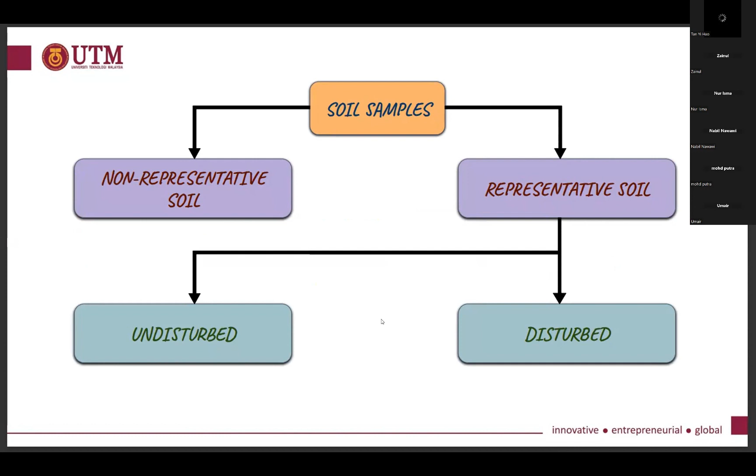Okay, first, a disturbed soil sample is soil that has been changed from its natural condition by excavation or other means, in which care is taken to ensure that at least the composition of the soil remains unaltered. Obtained by more rugged but relatively crude methods, and can be used to determine mineralogy, particle size distribution, liquid limit, and plastic limit. Factors that affect sample disturbance: first is area ratio, second is clearance, and last is cutting edge taper angle.

And an undisturbed soil sample is soil at any depth that has not been excavated or disturbed by excavation or construction, in which care is taken to cause minimal disturbance to the density, structure, and water content of the soil. Obtained by carefully designed samplers, it can be tested in the lab to determine both the physical and engineering properties. The factors that influence the quality of an undisturbed soil sample: volume displacement, side friction, lateral expansion, variation in water content, hydrostatic pressure, environmental condition, and the last is handling and transportation.

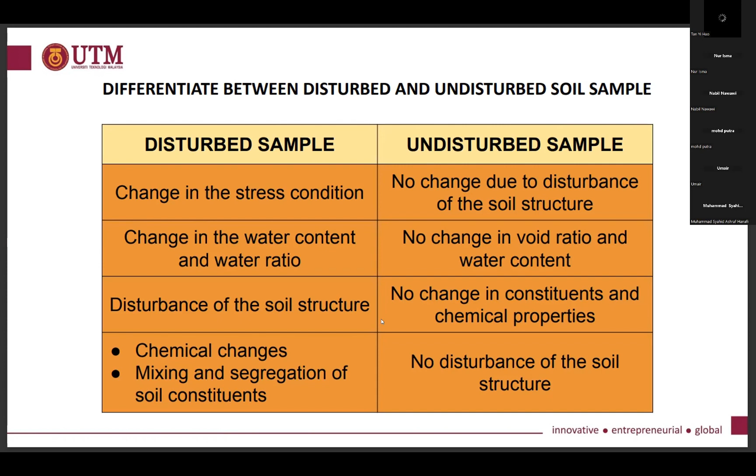Okay. Lepas tu type of sample ni adalah cara untuk kita dapatkan. For disturbed sample dia ada tiga. First is split barrel sampler, second is continuous auger, and last is bulk sample. For undisturbed sample is thin wall Shelby sampler, piston sampler, and block sampler.

Okay, first, the split barrel sampler is used to obtain disturbed samples in all types of soil. Typically used in conjunction with the standard penetration test. The test provides an indication of the relative density of the granular deposit and its approximate shear strength. Used for cohesive soil to determine its unconfined compressive strength. Available in standard lengths of 457 mm and 610 mm.

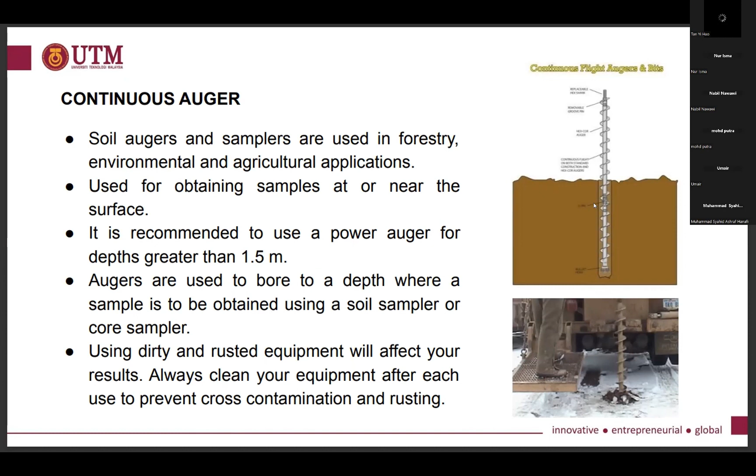And the last, bulk sample. These are disturbed samples obtained from auger cuttings or test pits. The quantity of the sample depends on the type of testing to be performed, but can reach up to 25 kg or more. Testing performed on the sample includes classification, moisture density, limerock bearing ratio, and porosity tests. A portion of each sample should be placed in a sealed container for moisture content determination.

And for undisturbed sample, first is thin wall Shelby sampler. A Shelby tube is a thin walled tube with one end that has a cutting edge and another that has the attachment required for the sampler head. Shelby tubes are used for collection of intact and mostly undisturbed samples of fine grained soil like clay or silt. The diameter of the Shelby tube is 3 cm or 4 cm and the length is 30 cm. Shelby tubes can be made of steel, stainless steel, galvanized steel or brass.

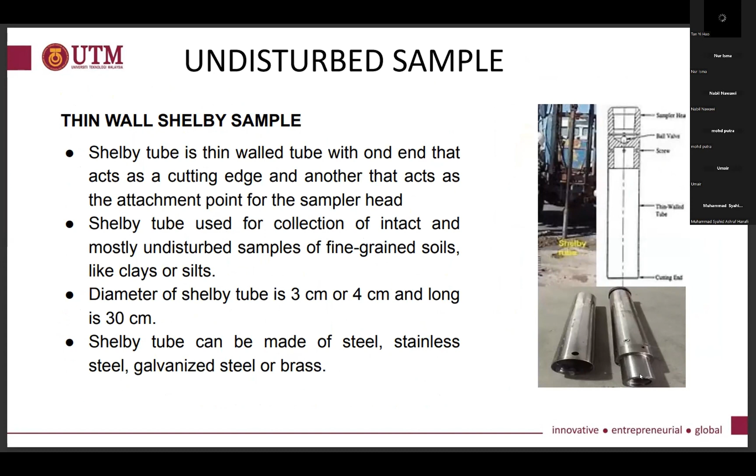Okay, method of thin wall Shelby sample. The tube must be attached to a string or the rod and lowered into the borehole. The sample is placed into the undisturbed soil by hydraulic force.

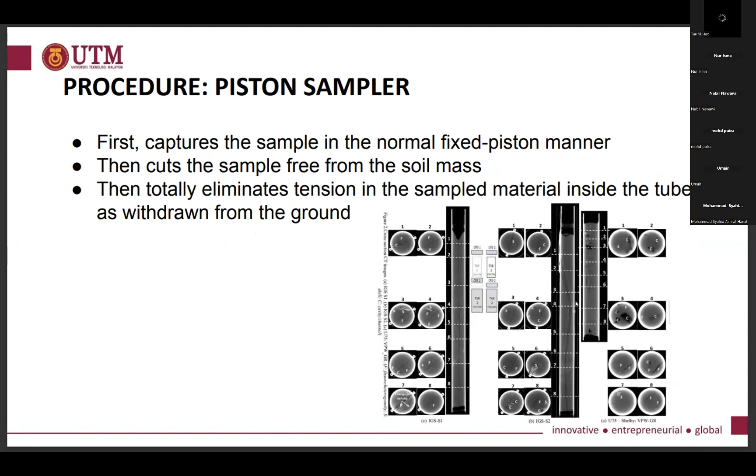Okay, and the last, block sampler. Block samples have not traditionally been available for testing from deposits of clay. In the past decade there has been increasing use of rotary coring methods to obtain such samples, and they are capable of producing very good quality samples.

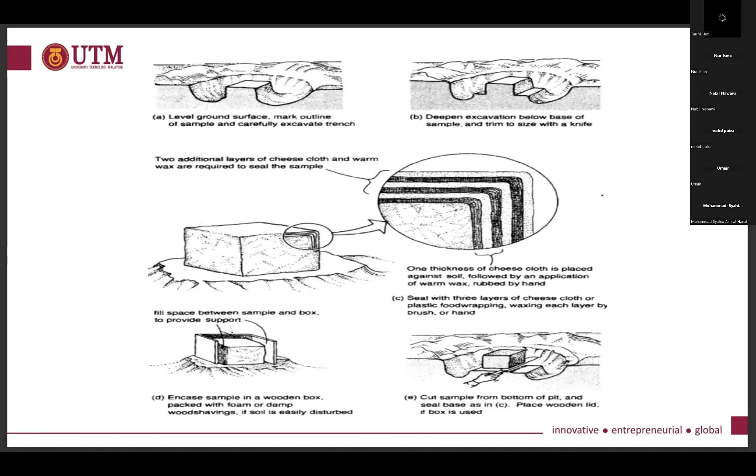So that's all from expert group 1. Thank you.

Next, Yasin. Sin. Hello.

Okay, next chapter is rotary wash drilling machine. Next slide. There are 4 contents in this slide, which are introduction, type, procedure, and advantage. The first thing I want to explain is the background of rotary wash drilling. Rotary wash drilling is one of the methods of borehole drilling to observe the condition, characteristic, and quality of soil, specifically to check the minerals contained in the soil.

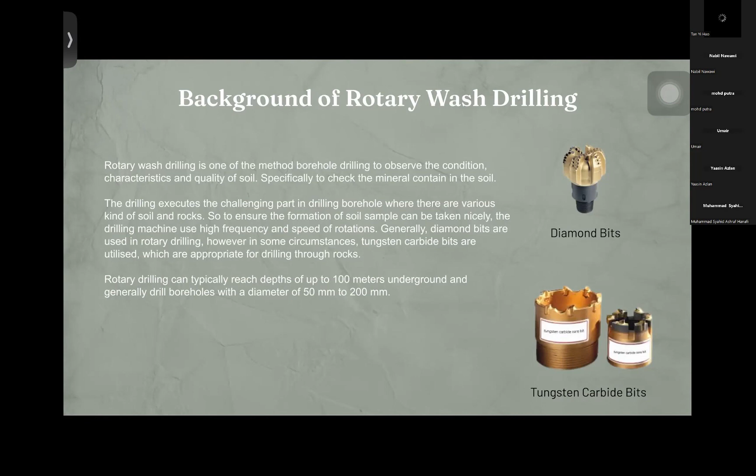Rotary drilling can typically reach depths of up to 100 meters underground and generally drills boreholes with a diameter of 50 millimeters to 200 millimeters. This is a sample of diamond bits and tungsten carbide bits.

Next is the types of rotary wash drilling. There are two types. The first one is open hole drilling, where the oil reservoir is completely exposed during completion of a straight or horizontal well. Basically, this open hole drilling is for soils and weak rock conditions. Then the other one is core drilling. Core drilling employs a hollow punch or drill bit to remove a clean core. And this is usually for hard rocks and hard clays.

The procedure of the rotary wash drilling machine: the first step is in the rotary method, the hole is drilled by a rotating bit to which a downward force is applied. Then the bit is fastened to and rotated by a drill string composed of high quality drill pipe and drill collars, with new sections or joints being added as drilling progresses.

Then the cuttings are lifted from the hole by the drilling fluid, which is continuously circulated down the inside of the drill string through water courses and nozzles in the bit, and upward in the annular space between the drill pipe and the borehole. At the surface, the returning fluid, which is mud, is diverted through a series of tanks or pits which afford a sufficient quiescent period to allow cutting separation and any necessary treating. In the last of these pits, the mud is picked up by the pump suction and repeats the cycle.

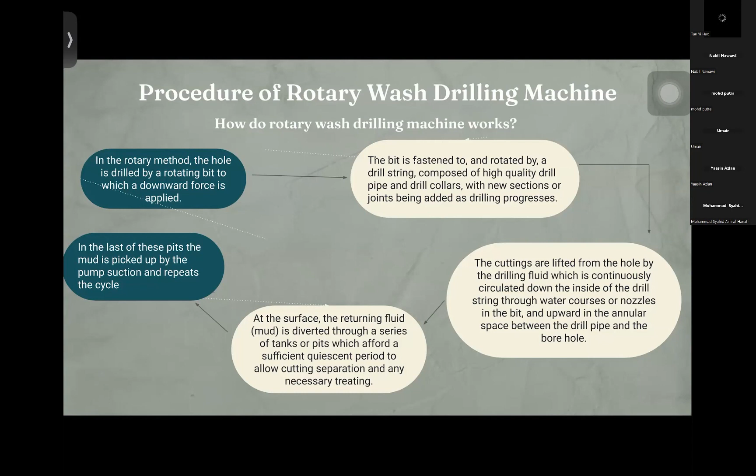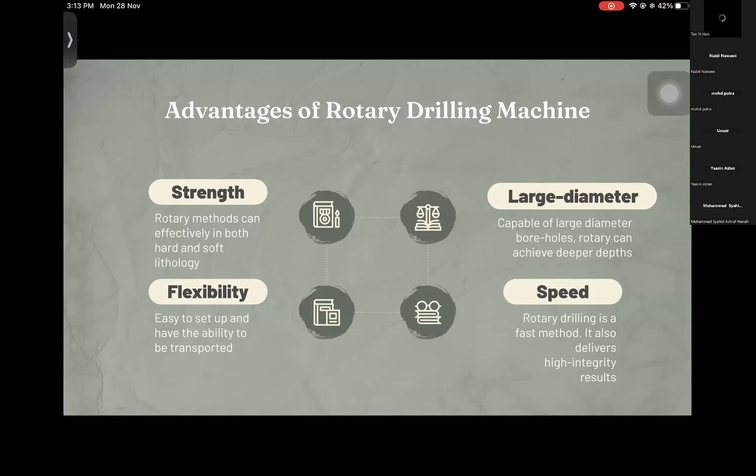And last is speed. Rotary drilling is a fast method. It also delivers high integrity results of the sample. So from that, we can know the availability, characteristics, and quality of soil based on the rotary wash drilling machine method.

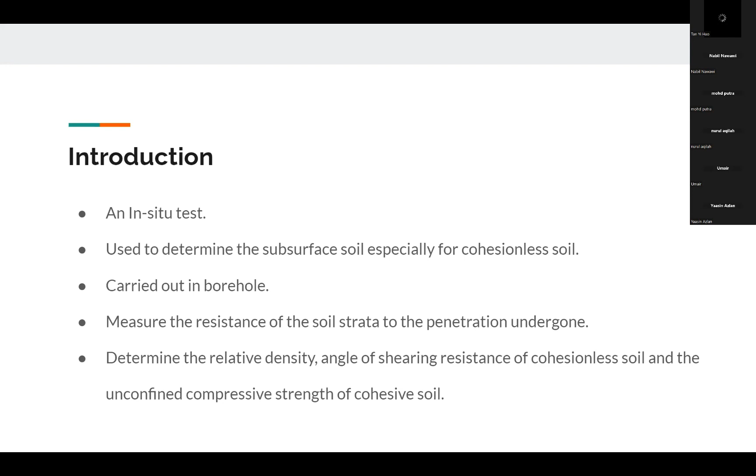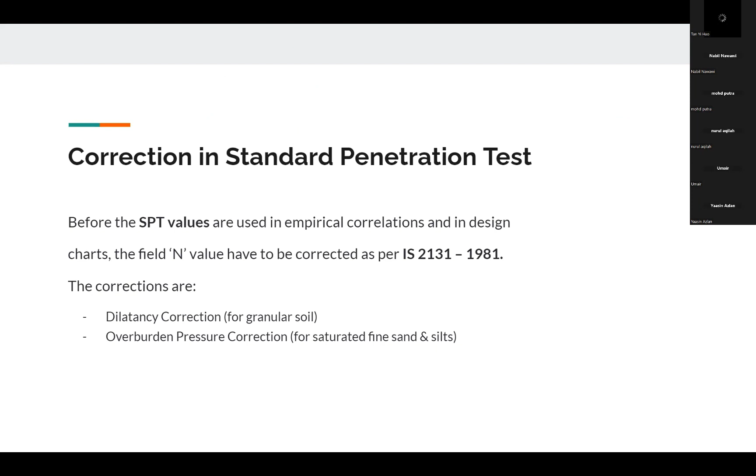The corrections in the standard penetration test. Before SPT values are taken, the N values have to be corrected. There are two corrections: dilatancy correction, used for saturated fine sand and silt, and overburden pressure correction for granular soil. The first one is dilatancy correction. This formula is used in the presence of fine sand and silt when the water table is at or above the test level. In this formula, the N1 value is taken as bigger than 15. These are the formulas.

Next is overburden pressure correction. It needs to be used in the presence of cohesionless or granular soil. Effective overburden pressure, or what we call confining pressure, is affected by depth. When the depth increases, the confining pressure also increases, so the SPT value is overestimated. When the depth decreases, the confining pressure also decreases, so the SPT value is underestimated. So this is the formula for overburden pressure correction.

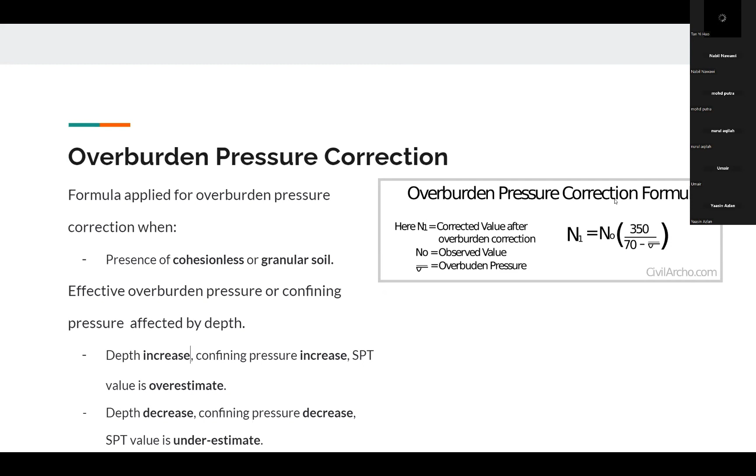Next. So I will continue the presentation. There are a few factors affecting the N values. The first one is the attitude of the operators. It may depend on who is operating the rig, so it can vary because of the mood of the operator and time of drilling. The next one is overdriven sampler. Higher blow counts usually result from an overdriven sampler.

The third one is drilling method. It may vary because there are a few drilling techniques. There are cased holes and mud stabilized holes. And the last one is not recording blow counts and penetration accurately. Next.

There are correlations between SPT and soil properties. When the SPT N value is between 0 and 4, the relative density is very loose. When it reaches 4 to 10, it becomes loose. 10 to 30 is medium, 30 to 50 is dense, and above 50 it's very dense.

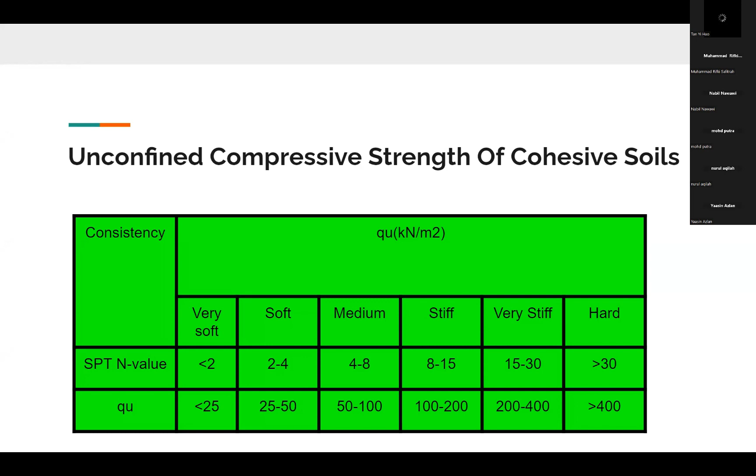There are a few advantages of using the SPT. The first is the test is quick, simple, and economical. It provides a representative soil sample for visual inspection, classification test, and moisture content. It is able to penetrate dense layers, gravel, and fill, and provides a useful index of relative strength and compressibility of the soil.

There are also disadvantages of using the SPT method. The result will vary due to mechanical or operator factors, as mentioned earlier. The test is costly and time consuming. The sample retrieved for testing is disturbed, and the test results from SPT cannot be reproduced. Also, the application of SPT in gravels, cobbles, and cohesive soil is limited.

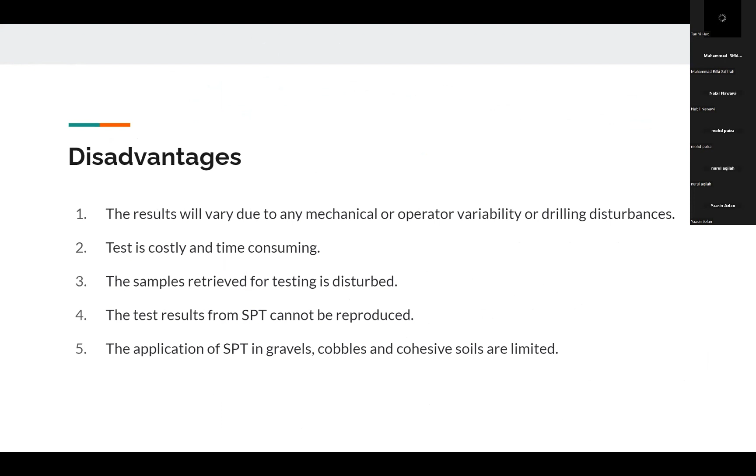We have some precautions during the test. The split spoon sampler must be in good condition. The cutting shoe must be free from wear and tear. The height of fall must be 760 millimeters; any changes from this will affect the N value. The drill rods used must be in standard condition, and bent drill rods are not used. Before conducting the test, the bottom of the borehole must be clean.

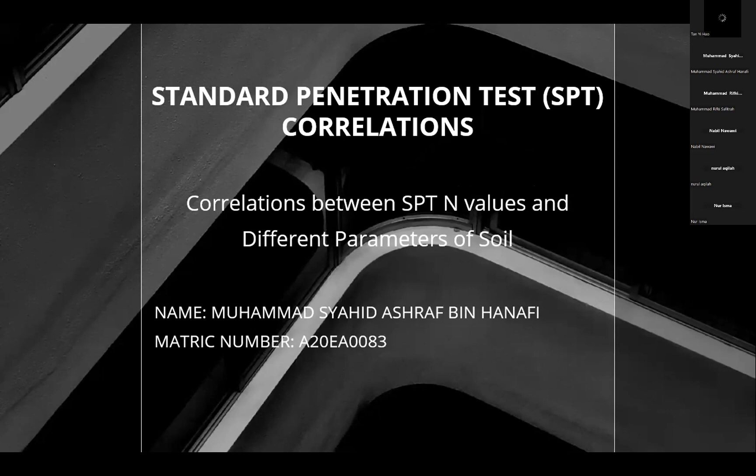So what is SPT? As the previous presenter already told you, SPT is used to correlate different soil parameters, and SPT can also estimate the bearing capacity of foundation and the stress strain modulus. This is exactly my part, which is the correlation between SPT N value and different parameters of soil.

Terzaghi and Peck give the following correlation with two types of soil between SPT value and other soil parameters, which is cohesion. For cohesionless soil, we refer to this table, and for cohesive soil, we refer to this other table. So what exactly are cohesionless soil and cohesive soil?

Cohesive soil is fine-grained soil, which means low strength and can be moved. For cohesionless soil, it is any free-running type of soil such as sand and gravel, and strength depends on friction between particles.

Moving to this slide: correlation with unconfined compressive strength of cohesive soil is shown in equation 1.1, modified from the Terzaghi and Peck relationship, from this table. From this table, we create the equation for unconfined compressive strength. The correlation with angle of internal friction of cohesionless soil in equation 1.2 was originally a graphical representation by Peck; from this representation we get these equations.

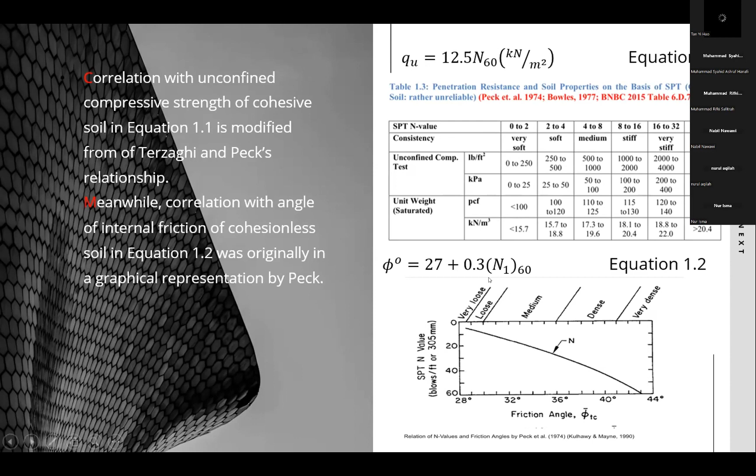Next, from this we can see N60 and N1,60. How do we get that? We use this formula.

N60 represents the corrected SPT N value for field procedure. EH represents the hammer efficiency, which we need to refer to in the table. CB is the borehole diameter correction, also referred to in the table. Sampler correction and rod length correction are also referred to in the table.

N measured is the SPT N value from the data. This is the correction of SPT value for overburden pressure.

How do we get CN? We use this formula. There are two researchers who did this research, and they got different types of overburden pressure correction factors, but you can use either one.

So what is the symbol? The symbol represents effective overburden pressure. For this, we will refer to Table 1.1.

This is Table 1.1, which we need to refer to in order to get this value. This table shows the hammer type, how the hammer type works, the diameter of the hole, and also sampler correction, either standard sampler or standard without liner.

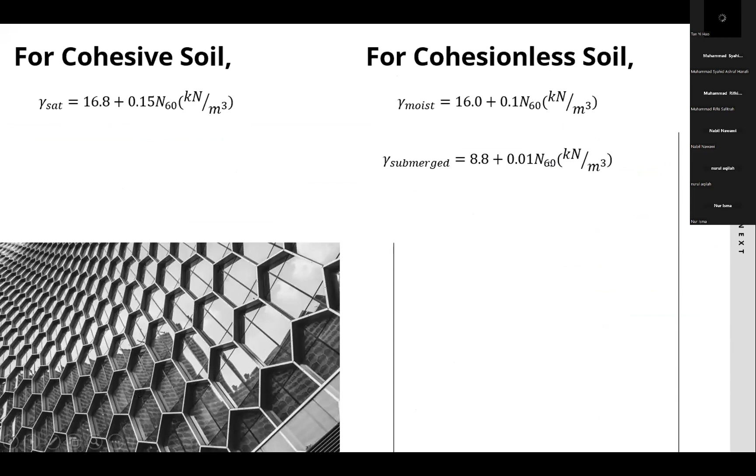We can use, if we know the soil type by soil classification, we can use this formula to get the angle of internal friction. This is a basic example. Given field N value equal to 15, depth 6 meters below ground level, soil type sandy micaceous, no water table was observed within the depth. Standard penetration test was performed with standard split spoon sampler and hand drop donut hammer. Bore diameter was 100 millimeter.

First step, we need to find the N60 value, using the formula from the previous slide. We need to find the corrected SPT N value for field observation, and this value is obtained from table 1.1. Then we use this formula to get the length of hole, and we refer to the table to get this value. This is already given, then we get the N60 value.

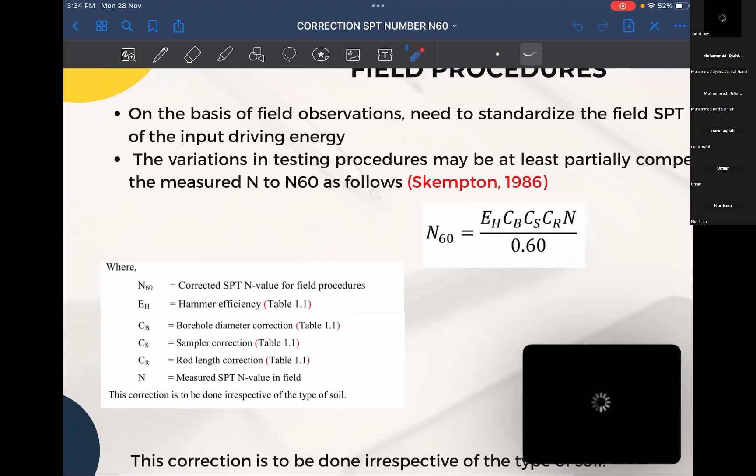So on the basis of field observation, we need to standardize the field SPT number as a function of the input driving energy. The variation in testing procedures may be at least partially compensated by converting the measured N to N60 as follows. This is the given equation, whereby the variables in this formula are as shown in this area.

For the value of EH, CB, CS, CR, and N, CR can be referred to table 1.1, same as our previous presenter. So the factors shown are normally applied, however those factors may vary depending upon availability. Correction may be made with respect to overburden and expressed as suggested by Whitman. So this is the table, same as Syahid explained. So this is all from me, thank you.

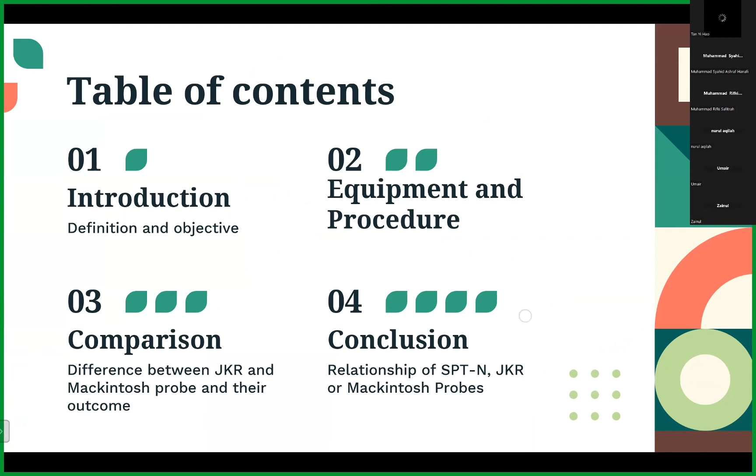First, introduction: definition and objective. Definition: the JKR probe is a simple site investigation procedure that is relatively inexpensive. The probe is often used in Malaysia, especially for preliminary site investigation to assess the subsoil layer and the bearing capacity of soil. There are 3 objectives for this type of probe: collecting a disturbed soil sample for grain size analysis and soil classification, determining the subsurface stratigraphy and identifying materials present, and evaluating soil density and in situ stress condition.

We will knock the rod to determine all this type of information.

So we move on to equipment and procedure. The apparatus for the Mackintosh or JKR probe test: the first one is the coupling, which is a connector for the rod, then the penetration rod, cone, wrench (pipe wrench), and lifting device, plus hammer, body cap, and nut.

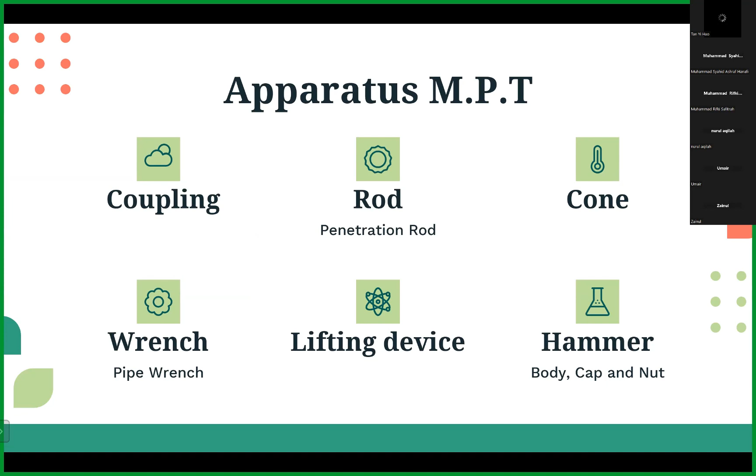So we move on to the procedure for the Mackintosh JKR probe test. First, we raise the hammer to its maximum height and release it freely. Then we apply grease to the rod coupling. After that, remove the hammer, attach the rod coupling to the pretest penetration rod, and set another penetration rod to the coupling. Then we reinstall the hammer, nut, and cap to continue the process. Continue the hammering process until the soil has reached the set condition. When the test is done, we use the pipe wrench to remove the rod and coupling. After that, the data obtained is tabulated in the form and the graph is plotted.

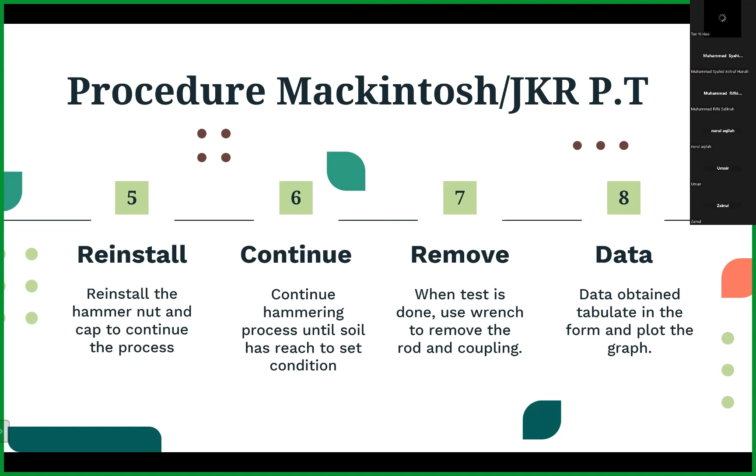This is the precaution, because we typically use this type of test manually, so human error cannot be avoided. There are some precautionary measures to prevent errors in testing: the drop of the hammer should be a free fall with a consistent drop height, and components and apparatus should be properly washed and oiled. This is because we do not want the components inside the penetrating rod to be damaged, and to keep the assembly intact.

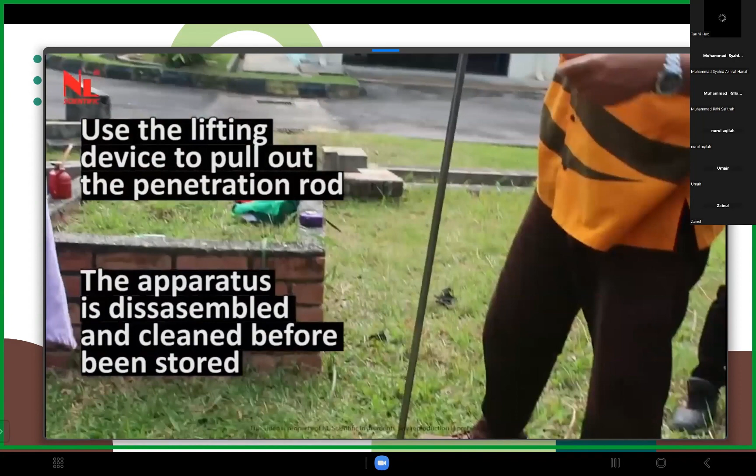So that's all, so we proceed to comparison. Hi, my name is Fatima, I will continue the presentation. For comparison: the difference between the JKR and Mackintosh probe and their outcome.

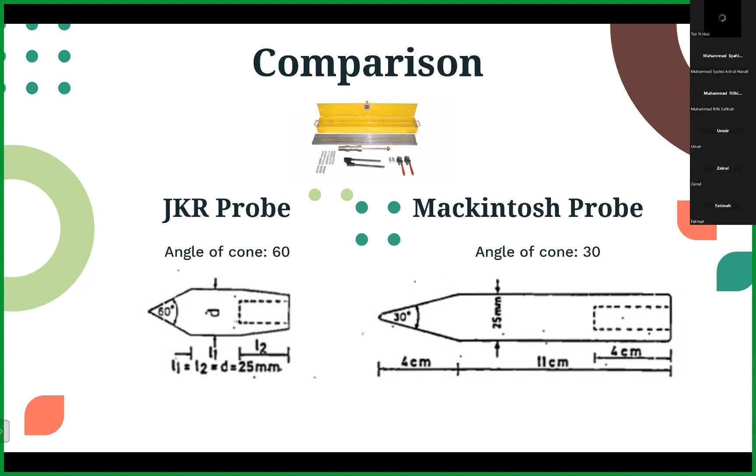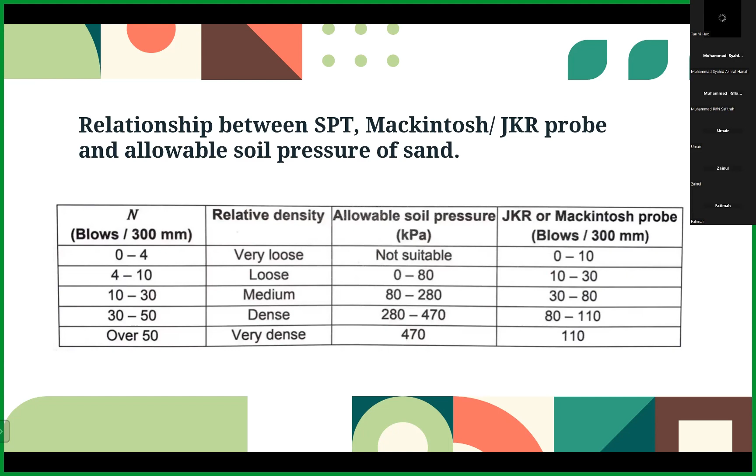As a conclusion, the Mackintosh or JKR probe is very useful in site investigation to measure the suitability of soil for construction work. The advantages of using this method are that it may reduce the testing cost, it's easy to do, it reduces the number of boreholes required, and it increases the speed of operation. So that's all from our group. Thank you.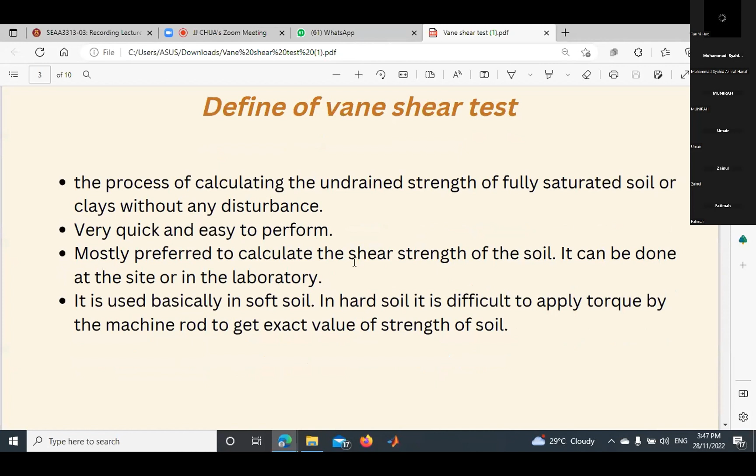The definition of vane shear test is the process of calculating the undrained strength of fully saturated soil or clay without any disturbance. It is a very quick and easy test to perform, and it is mostly preferred to calculate the shear strength of soil. It can be done either on site or in the laboratory. It is basically used in soft soil because in hard soil it is a bit difficult to apply torque by the machine to get the exact value of strength of soil.

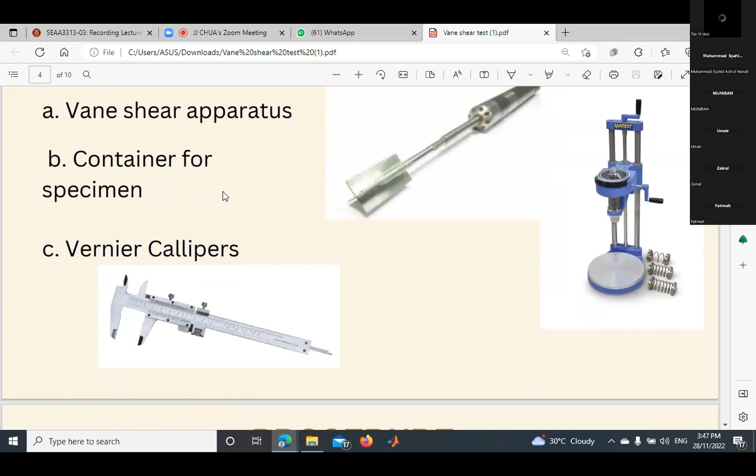This is the equipment that we use to do this test, which is the vane shear apparatus. This one we use on site, and this one we use in laboratory. The second one is the container for specimen, which is only used when we do the laboratory test. And the last one is the vernier calipers.

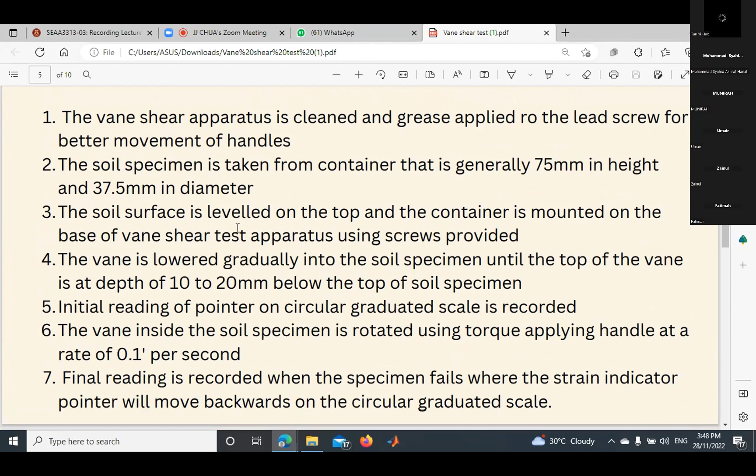The procedure for this test: first we need to clean the apparatus, then grease the lead screw for better movement of the handle. Second, the soil specimen is taken from a container that is generally 75 millimeter in height and 37.5 millimeter in diameter. The top of the soil surface is leveled, and then the container is mounted on the base of the vane shear test apparatus using a screw. Then the vane is lowered gradually into the soil specimen until the top of the vane is at a depth of 10 to 20 millimeter below the top of the soil specimen. After that, we can read the initial reading of the pointer on the circular graduated scale.

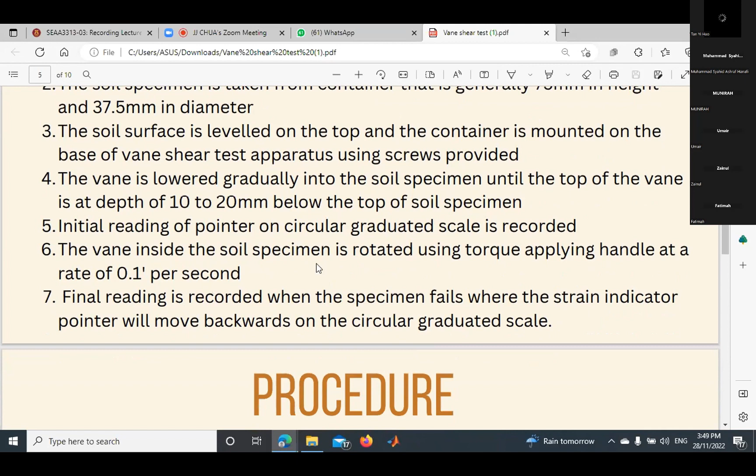The sixth step is the vane inside the soil specimen is rotated by applying torque using the handle at the rate of 0.1 per second. Lastly, the final reading is recorded when the specimen fails, where the strain indicator pointer will move backward on the circular graduated scale. The angle of the torque can be read by taking the difference between the initial and final readings. The procedure is repeated with two more soil specimens and the average shear strength is calculated.

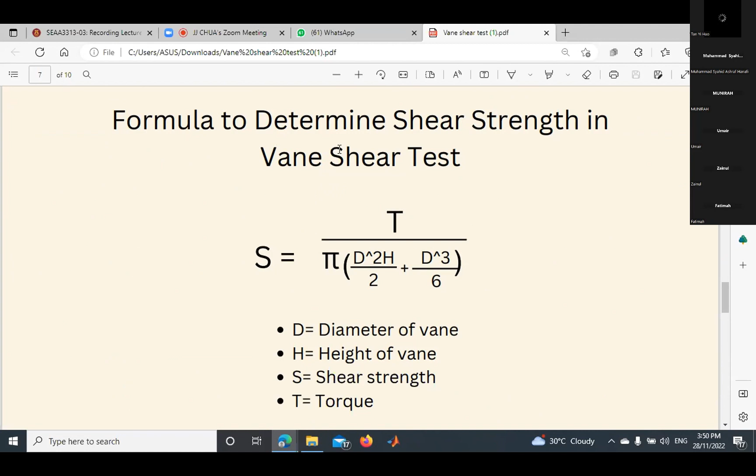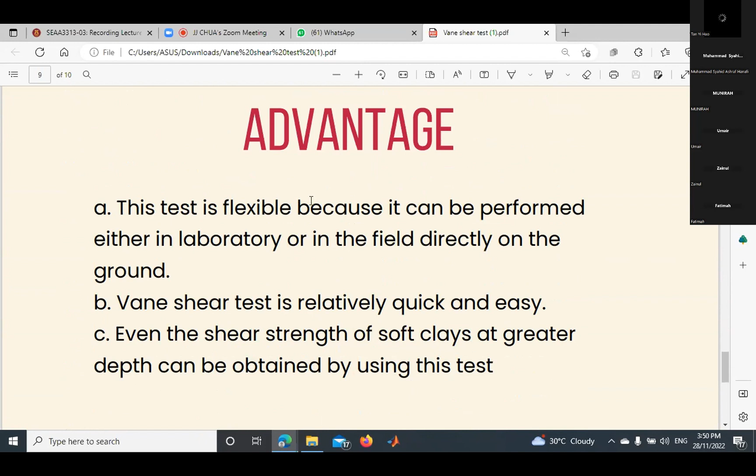The advantages of this test: it is flexible because it can be performed either in the laboratory or in the field directly on the ground. It is relatively quick and easy. Even the shear strength of soft clay at greater depths can be obtained by using this test.

CPT is an in-situ test that is used to identify the soil type. In this test, a cone penetrometer is pushed into the ground at a standard rate of 20 millimeter per second, with regular intervals during penetration. The cone penetrometer is instrumented to measure penetration resistance at the tip and friction on the shaft. During the test, it is conducted using a 20-ton truck or smaller vehicles, depending on the site condition.

The advantages of CPT are fast and continuous profiling, repeatable data, economical and productive, and a strong theoretical basis for interpretation. During the test, we come up with 3 measurements, which are QC, the measured cone resistance, FS, the sleeve friction, and U2, the water pressure. It's also portable, so we can move it from place to place.

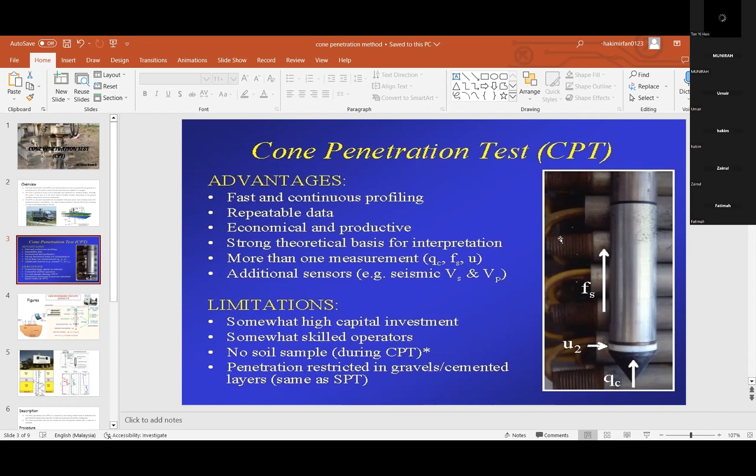This is a figure of what the equipment looks like. There's an electric rod inside the hydraulic rams which gives the data from the test, and we can trace the pressure.

After the penetration, we will come up with 3 graphs, which consist of those 3 measurements versus the depth. With these 3 graphs, we can determine the type of soil being tested. For the procedure, I will show you a video.

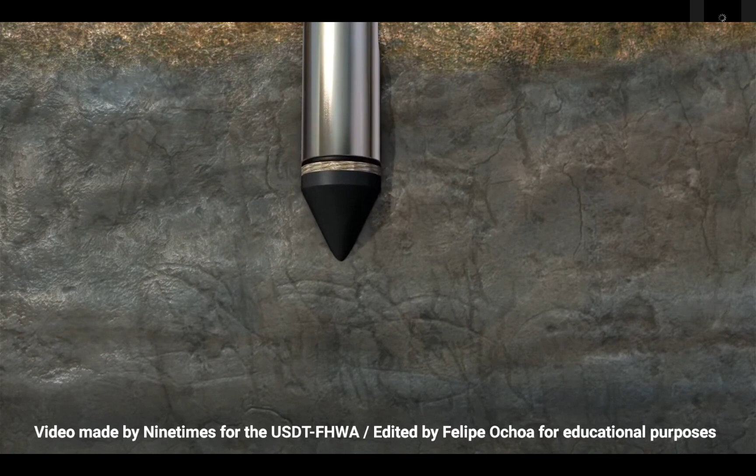Cone penetration testing is a fast, accurate subsurface exploration method. A CPT rig uses hydraulics to push a steel cone into the ground at a constant rate. The instrumented cone records continuous measurements of tip resistance, sleeve friction, and dynamic pore water pressure.

The data record allows for differentiation of soil layers and interpretation of material properties. The cone stops at refusal in dense soil or rock.

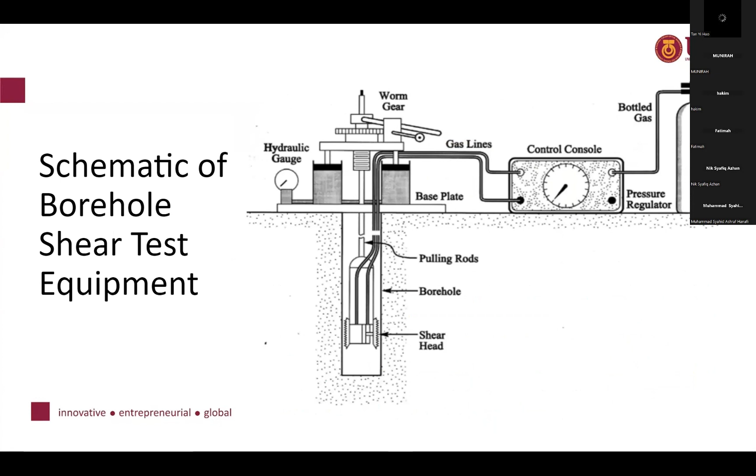So we go to the procedure of the borehole shear test. The procedure is very simple. First, we need to form a borehole at the predetermined position. For the requirement of the borehole, the minimum diameter must ensure the shear head can be easily installed into the hole, and the maximum diameter must ensure the borehole wall can be touched when the shear plate is fully expanded.

After the borehole is settled, we can install the unexpanded shear head into the borehole to engage the soil along the side of the hole. We can start the borehole shear test, so the shear plate is penetrated into the soil by applying a certain magnitude of normal pressure.

Once the shear head has been expanded and sufficient time for consolidation is given, the shear head is pulled upward slowly to induce a shear failure in the soil. Then we can get the reading of shear force and normal force. Go to the next slide.

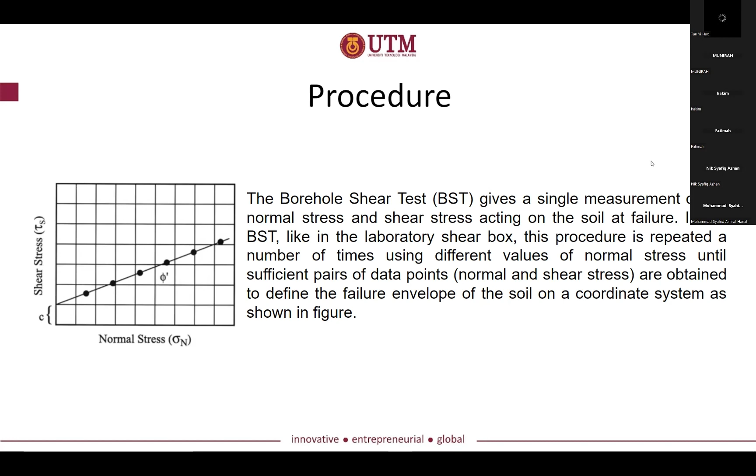Then with this slide, we can continue to find the parameters of the soil, because we do the borehole shear test to determine the failure of soil, to determine the parameters. So we can use the Mohr-Coulomb strength theory to find the cohesion and friction of the soil. So from the diagram, we can see when we get the data from the borehole shear test, we can get a straight line from the data, and then we can draw a Mohr circle from the data, and then we can get the cohesion and friction.

Next. So the borehole shear test is similar to the direct shear test, but the borehole shear test is an in situ test. So we don't need to carry out the test in the laboratory, and it is very straightforward and easy to install.

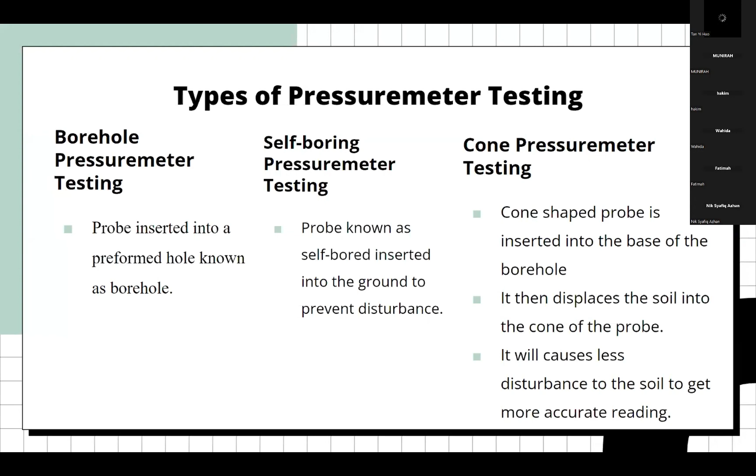Okay, next, procedure of the pressure meter test. So basically, first we have to drill the borehole, and the diameter of the borehole should be between 1.03 probe diameters and 1.20 probe diameters. Then the probes are slowly lowered down to the required elevation using a cable. After reaching the desired elevation, the probe is fixed using a clamping device. Then the control unit of the pressure meter will open the valve, which admits water into the measuring cell and gas into the guard cell respectively.

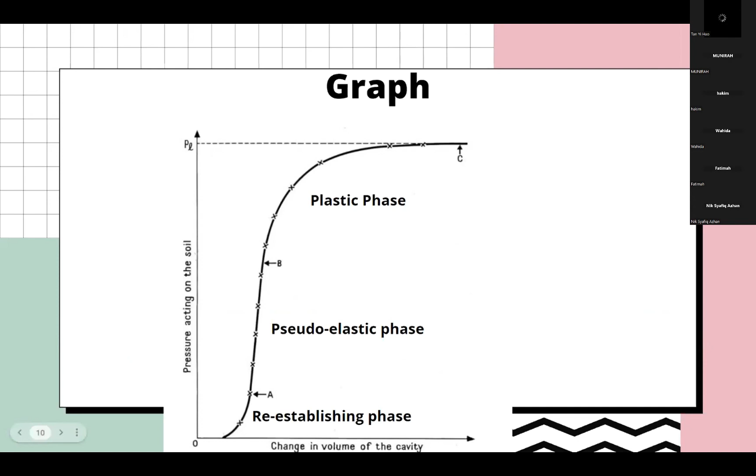After getting the reading, what do we do? We make a graph using the change in volume of the cavity on the x-axis and the pressure acting on the soil on the y-axis. The change in volume of the cavity is basically water, and this is the pressure obtained from the control unit reading.

Okay, next, the method. As mentioned, there are 2 methods, the equivalent pressure increment method and the equivalent volume increment method. For the first method, after completion of time, the volume change is noted. Similarly, the pressure increment for the next amount of time, usually 1 minute, is applied and the volume will change. We note the volume change. This process is repeated until the limit pressure is reached.

Okay, next, equivalent volume increment method. The probe volume is increased by 5% for each increment. The probe volume is the water put into the probe. Then the probe is held constant for 30 seconds. After 30 seconds, the pressure reading is noted, and this test can be done at every 1 meter interval in the borehole. Okay, next, formula.

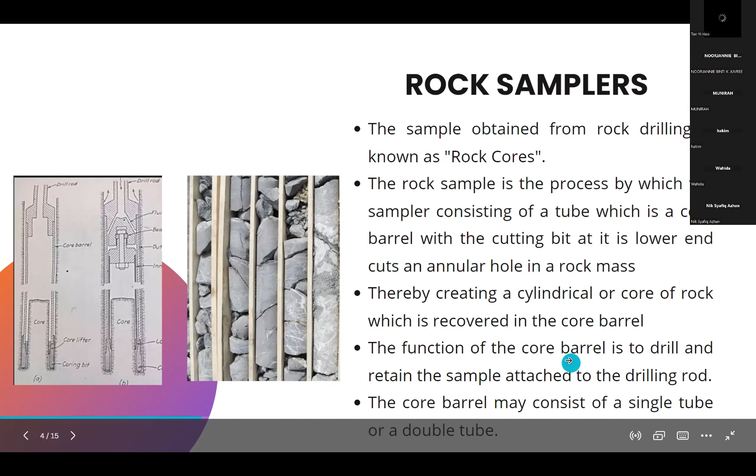The function of the core barrel is to drill and retain the sample attached to the drilling rod. And lastly, the core barrel may consist of a single tube or double tube. For single tube, the sample taken is likely disturbed due to torsion, swelling, and contamination by drilling fluid. This can be avoided in hard, intact, and rocky strata. For double tube, the core is protected from circulating fluid because the inner tube prevents washing away of the core due to the prolonged flow of water.

Okay, next, the method of rock sampling. There are two types of sample. First, rock disturbed: the method of sampling is wash samples from percussion or rotary drilling. Next, the type of sample is rock undisturbed. Rock undisturbed has two methods of sampling, which are core samples and block samples.

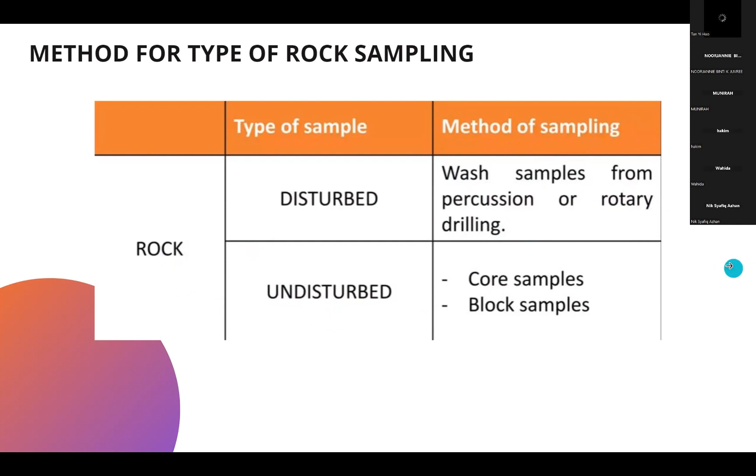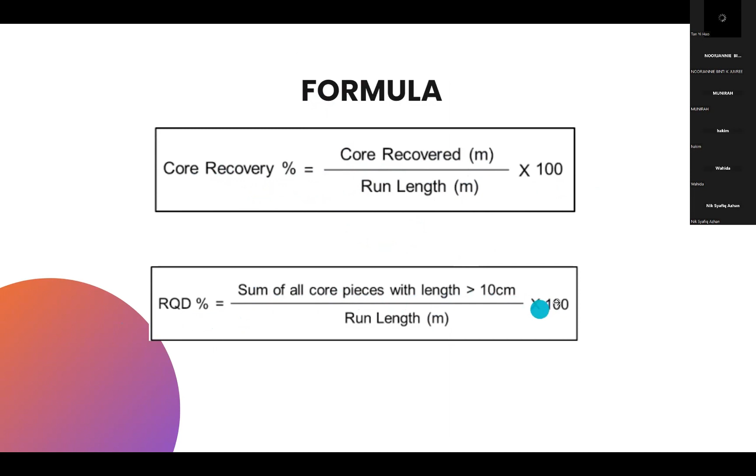Okay, next, this is how to calculate rock sampling using the formulas. First, core recovery percent is core recovered divided by run length times 100. And then RQD percent is the sum of all core pieces with length more than 10 centimeters divided by run length times 100. So this is how to calculate it.

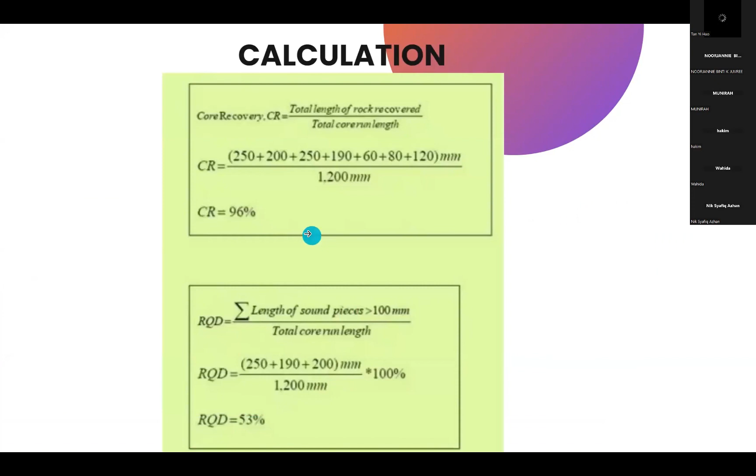Okay, next, the rock quality. So from what we calculate for the RQD, we can know the rock quality. If the RQD is less than 25, the rock quality is very poor. If the RQD is 25 to 50%, the rock quality is also poor. 50 to 75, the rock quality is fair. 75 to 90, the rock quality is good. And lastly, if the RQD is 90 to 100%, the rock quality is excellent.

And then lastly, how to know the strength range, strength classification, and typical rock types. If the strength range is 10 to 20 MPa, the strength classification is very weak, and the typical rock types are weathered and weakly compacted sedimentary rocks. If the strength range is 20 to 40 MPa, the strength classification is weak, so the typical rock types are weakly cemented sedimentary rocks and schist.

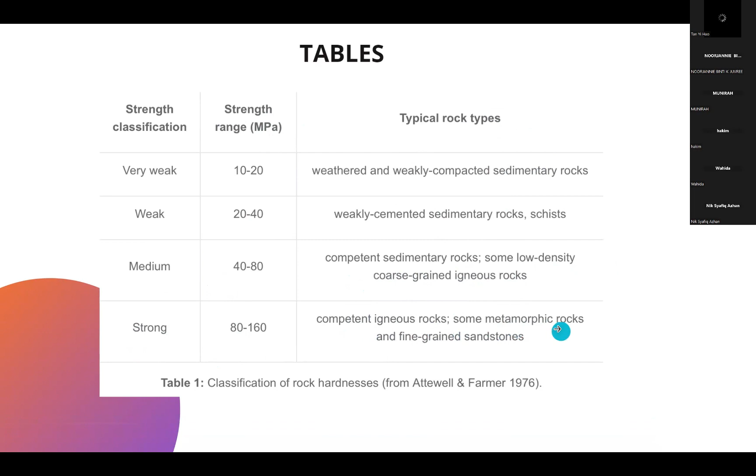If the strength range is 40 to 80, the strength classification is medium, so the typical rock types are competent sedimentary rocks and some low density, coarse grain igneous rocks. And lastly, if the strength range is 80 to 160 MPa, the strength classification of the rock is strong. So the typical rock types are competent igneous rocks, some metamorphic rocks, and fine grain sandstone.

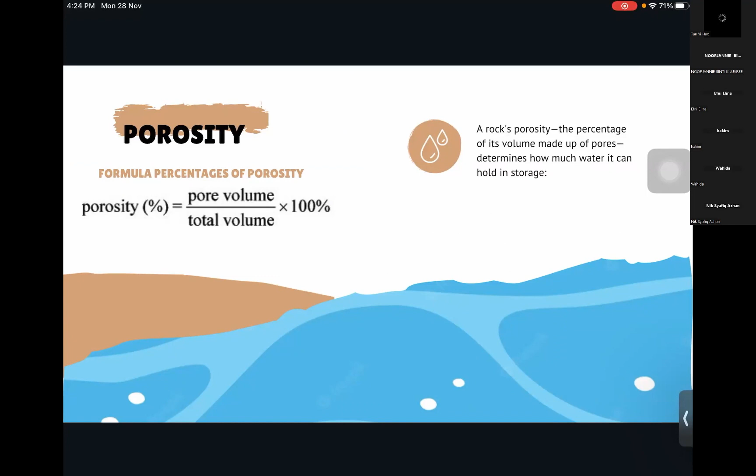So next is groundwater movement. As we know, water travels through the environment according to the water cycle. Water runs off into streams or lakes as it falls to the ground as snow or rain. Water on the surface evaporates, then later condenses, which can bring rain or snow. Actually, surface water is linked with groundwater because groundwater released to the surface becomes surface water. Furthermore, surface water can also refill the groundwater at the water table.

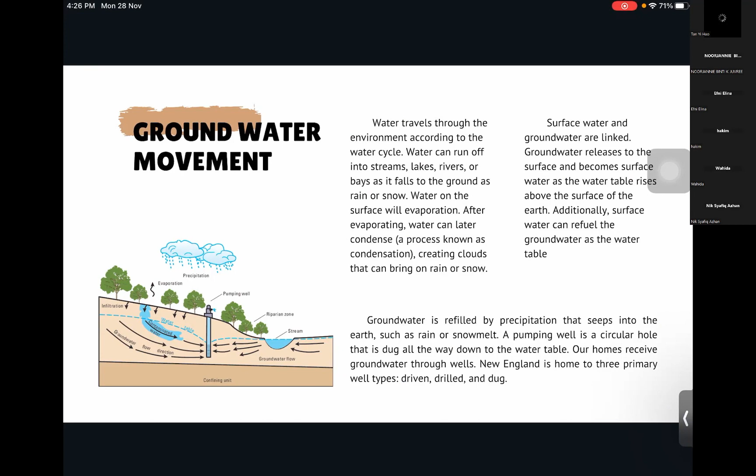So next, the effect of groundwater table. Groundwater table will disrupt the slope stability. It also will affect by decreasing the soil strength. If the slope becomes unstable, the building will be affected by the presence of cracks. Other than that, groundwater can push the foundation, and this will increase the groundwater strength, which is hydrostatic pressure.

The foundation can actually be lifted, but if water seeps into the basement more through widening cracks and joints, it can penetrate the solid concrete.

So the use of the groundwater table is to find out how deep below the surface the water is, to avoid a shift in soil structure, because that is caused by changes in groundwater that will be unstable. Other than that, the understanding of groundwater and water level is very important for groundwater resource management. And the risk associated with high groundwater level can cause all sorts of problems on any project.

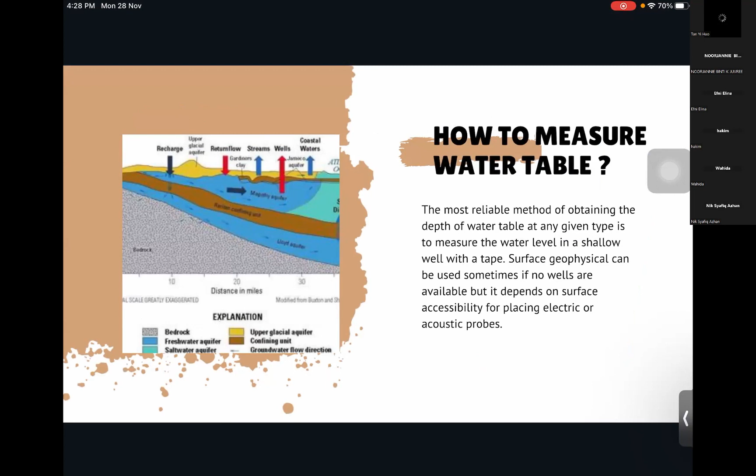So how to measure the water table? The most reliable method of obtaining the depth of the water table is to measure the water level in a shallow well with a tape. Surface geophysical methods can be used sometimes if no wells are available, but it also depends on surface accessibility for placing electric or acoustic probes. So this is the figure of the groundwater table.

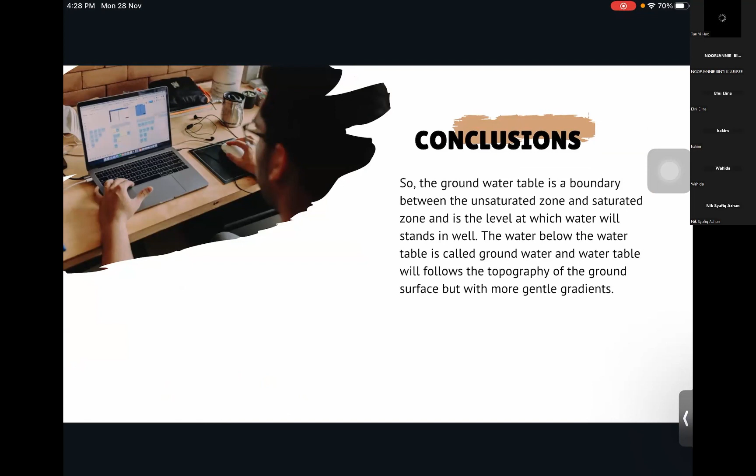So in conclusion, the groundwater table is a boundary between the saturated zone and unsaturated zone, and is the level at which water will stand in a well. The water below the water table is called groundwater, and the water table will follow the topography of the ground surface, but with more gentle gradients.

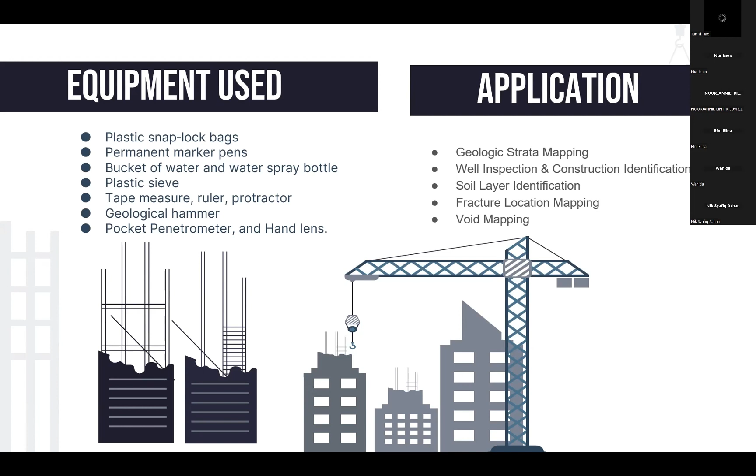The procedure: borehole logging should ideally be carried out in the field at the time of drilling in order to take advantage of interactions with the drillers. The logging area should be well lit and ventilated, and have sufficient bench or workspace for laying out multiple core trays. If the logging area is fully enclosed, the facility should be equipped with a dust extraction system.

How to read the borehole log? We have 3 methods. The first is the type of soil, cohesive clays or non-cohesive sands and gravels. The first method is to read the material description from the table. The terms are always used with their respective soil types and never interchanged, although notes about clay or sand may be included. Another way to determine the soil type is to look at the classification in the description, referring to the unified classification table to determine whether it is in the cohesive or non-cohesive division.

The second method refers to the water table. The extent of dewatering required has a significant impact on the cost of dewatering and shoring. It is usually called out in the heading as groundwater at time of drilling and groundwater at some later date. If there is no reference to water in the log, the general assumption would be none.

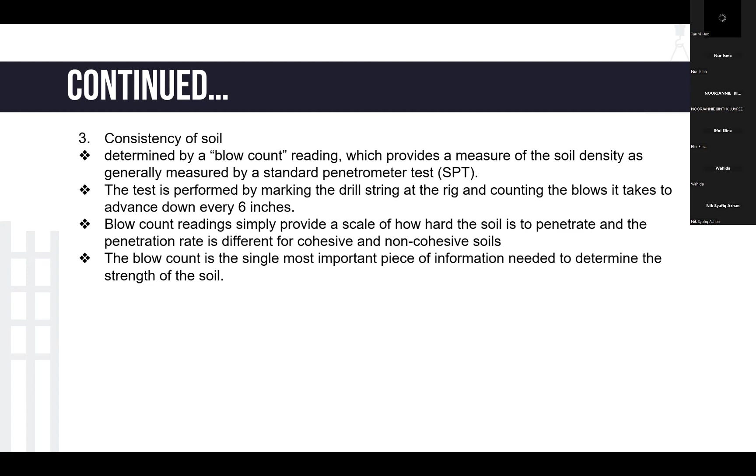The third method uses the consistency of soil, determined by a blow count reading, which provides a measure of the soil density as generally measured by a standard penetration test. The test is performed by marking the drill string at the rig and counting the blows it takes to advance down every 6 inches. Blow count readings simply provide a scale of how hard the soil is to penetrate, and the penetration rate is different for cohesive and non-cohesive soils. The blow count is the single most important piece of information needed to determine the strength of the soil.

Okay, kita teruskan kepada logging of soil samples. Logging of soil samples ni dia includes the descriptions, naming and classification of soils. Untuk description and naming, dia based on visual and tactile assessment of drill cuttings, as well as disturbed and undisturbed samples obtained from the drilling.

So to avoid misrepresentation, kita kena take note 4 benda ni. Yang pertama, kita kena cross-check sample information recorded on the draft borehole log and TMR borehole drilling data sheet. Yang kedua, disturbed SPT samples should be examined and described prior to sealing in label plastic containers or bags for storage in a cool place. Yang ketiga, the ends of undisturbed tube samples should be tested with a pocket penetrometer before sealing. Dan yang terakhir, after extrusion and selection of material for laboratory testing, the remainder of the undisturbed sample should be split, examined, described, and stored in a sealed labeled plastic container.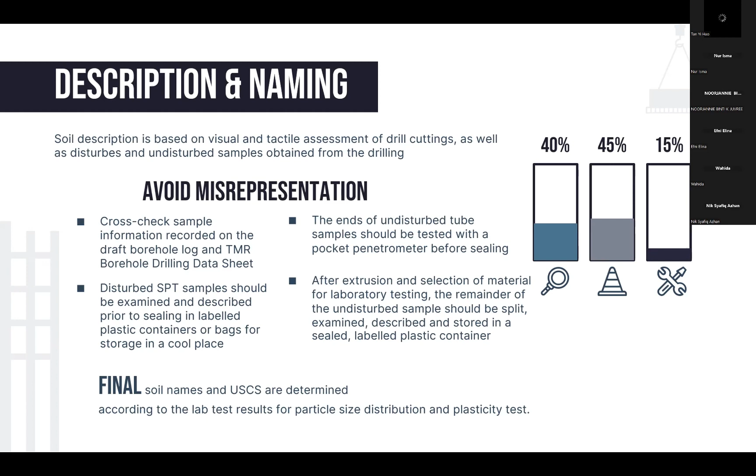So the final soil names and USCS are determined according to the lab test result for particle size distribution and plasticity test.

Okay, so untuk soil kita dah habis, kita move kepada rock samples. Untuk rock samples ni dia ada description, naming and classification of materials based on the characteristic of the intact rock and the discontinuities.

Okay, so the description and naming, they relies upon visual and tactile assessment of core rock samples. It is best practice to inspect and describe the core samples as soon as they are sampled and boxed in natural light and in the wet condition. So to achieve this, the geologist must ensure that the core is clean. A spray bottle is useful for keeping the core wet and use it while carrying out the inspection and description.

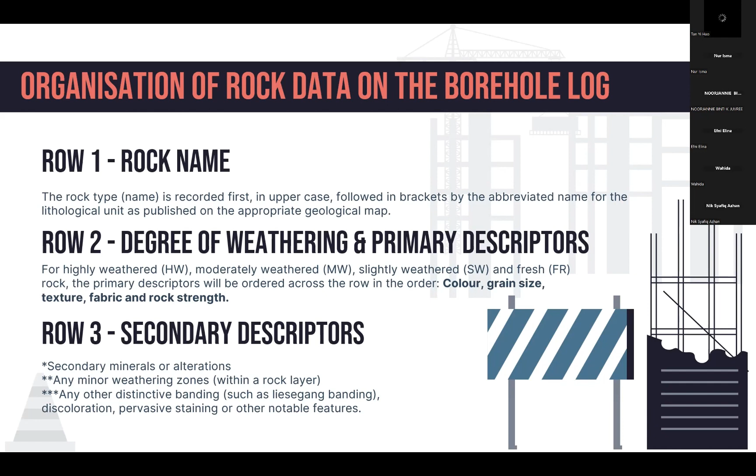Row ketiga, secondary descriptors. Ni ialah secondary minerals or alterations, any minor weathering zones within a rock layer, any other distinctive bandings such as liesegang banding, discoloration, pervasive staining, or other notable features. Dan row keempat, discontinuity sets. Ini listed in order of prevalence down the column and described across the row in the following order: discontinuity type, angle of incidence, frequency, roughness class, aperture, infilling.

Zones and coatings must be described in terms of both composition and thickness dalam millimeter. Drilling-induced defects must be distinguished from inherent discontinuity in the rock mass. Healed defects and other lineaments or anisotropic fabrics within a solid unbroken rock mass must be described as such. Note that the discontinuity persistence can only be measured in the field.

Jadi itu sahaja daripada tentang borehole logging. Terima kasih.

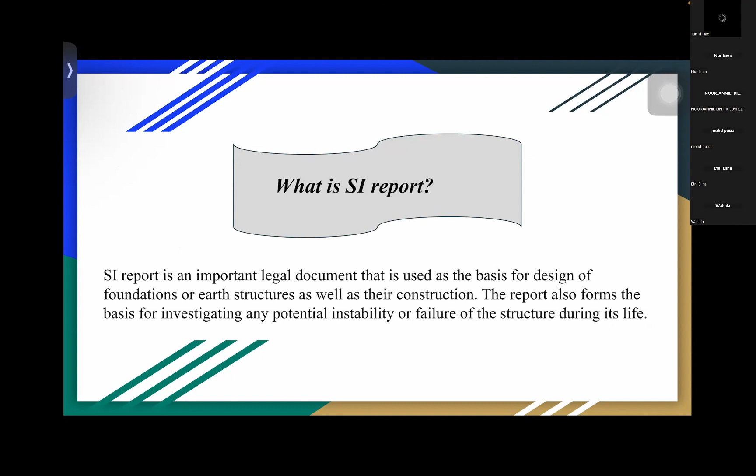The objectives of the SI report are: to ensure a safe and economical design of foundation, to minimize settlement or any such problem during the life of the structure, to predict and adopt measures to control possible construction problems, to investigate into failures or potential failures of existing structures, and to evolve an alternate design.

So next, this is the contents of the SI report. The first is introduction. This section indicates the client, company, and the project for which the geotechnical investigation is carried out. Usually we put the location, name of the soil investigator, and the main objectives or context.

Number 2 is objective of the geotechnical investigation. This section gives the detailed objective for which the geotechnical investigations are being carried out.

Number 3 is details of the proposed structure. This section gives the type and number of the proposed structures at the site, along with the extent of the area. It also specifies the nature of the structure, whether sensitive or non-sensitive, light or heavy.

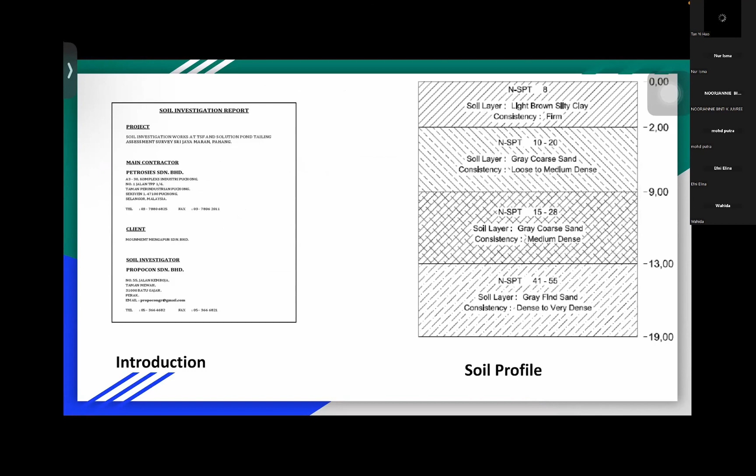This is an example of a soil investigation report. As you can see on the left side, and on the right side there's an example of the soil profile in the report. This is one example of a geotechnical engineering site investigation report that has been made by UMP. So that's all for my group. Thank you.

Okay. All group 14's presentation is done. So that's it. Thank you. Yeah, thank you guys. Thank you. Great, thank you.